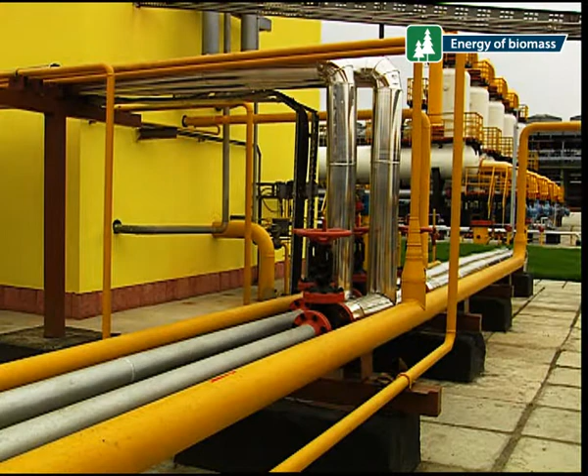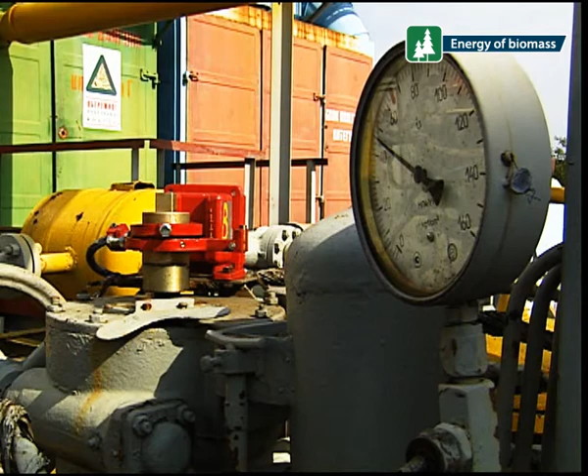Today, Ukraine depends on the import of natural gas, the biggest part of which is used for heat production. This dependency can be reduced by diversification of the supply chain and by increase of renewable energy sources usage.

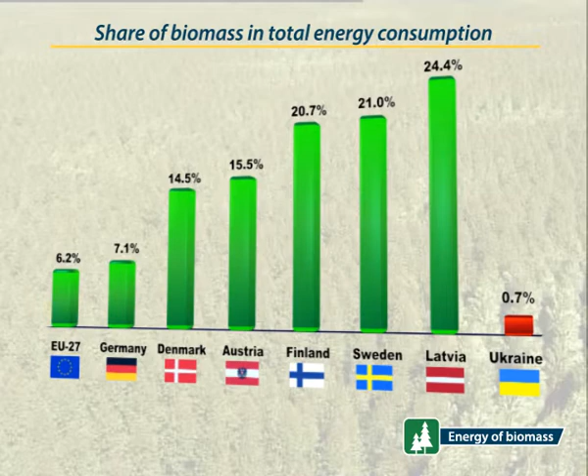Heat supply based on biomass is widely used in European countries. This renewable energy source is used as fuel at more than 800 combined heat and power plants and in tens of thousands of boilers. Today, 13% of heat and more than 3% of electricity is produced from biomass in Europe. It is planned to double these figures by 2020.

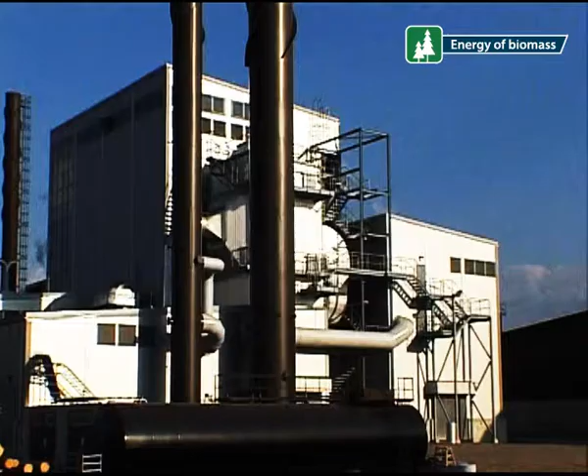Biomass Energy is a portfolio of projects aimed at the production and sale of green heat and electricity in Ukraine. It is realized by the implementation of biomass boilers and CHP plants in the municipal sector and industry.

The project, as a part of National Project Energy of Nature, is strategic for Ukraine, is aimed at sustainable development, and is secure for investments. The purchase price of the imported natural gas is growing annually. That creates stimuli for gas replacement by renewable energy sources, including biomass.

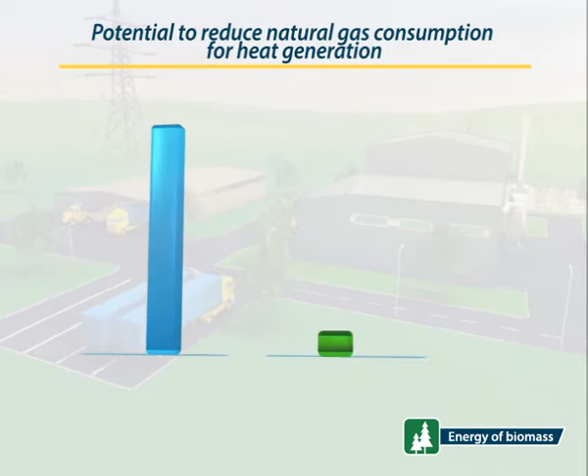Implementation of the project will result in reduction of natural gas consumption by over 5 billion cubic meters per year. The investments in the sector can exceed 2 billion euros.

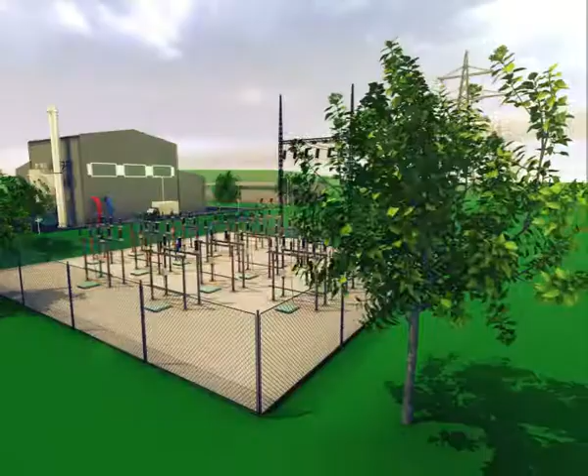The first step of the implementation of the project Biomass Energy is construction of a biomass CHP plant of a typical capacity of 2 megawatts electrical and 10 megawatts thermal. The plant will annually consume up to 40,000 tons of wood biomass, which allows supplying thermal energy to more than 100,000 square meters of heating area.

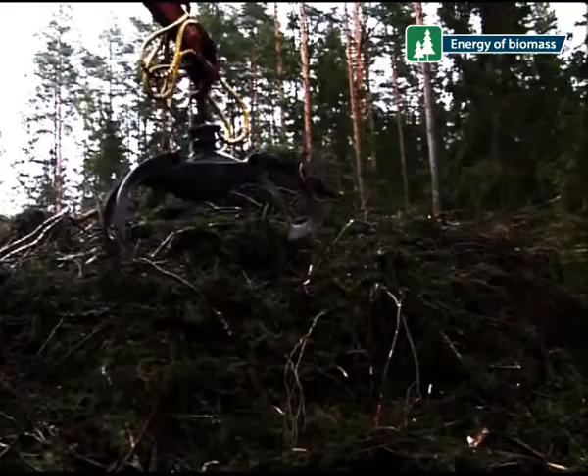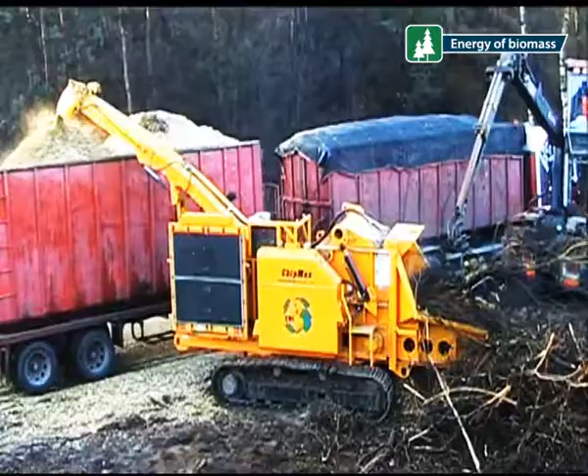The process of electricity and heat production at the plant begins with collection of the feedstock at the place of its origin. Wood residues are collected and shredded into wood chips in a mobile chipper. Then the obtained fuel is transported by a special vehicle directly to the CHP plant.

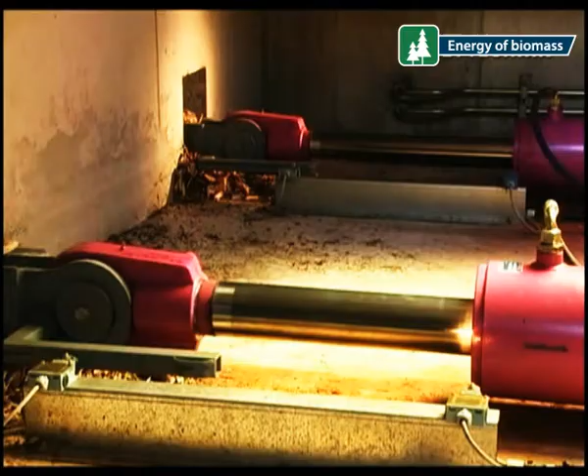It consists of 3 main buildings in which the fuel storage, the boiler house, the turbine house, and the offices are located. From the main storage, the fuel is transferred to the walking floor bunker, from which it is automatically supplied into the boiler for combustion.

The boilers, which produce steam for the turbine, are the core of the station. The steam turbine drives the electric generator.

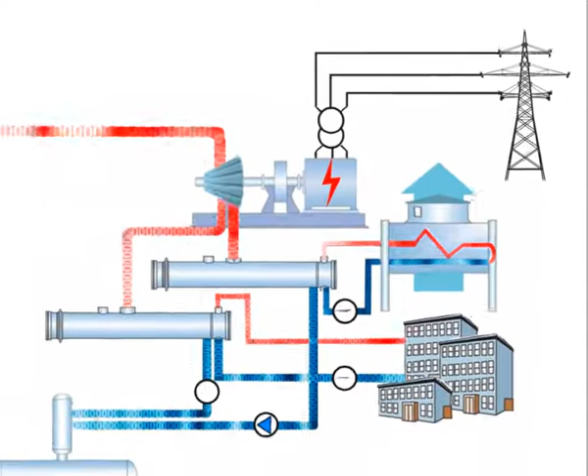Flue gases are cleaned by a modern precipitator. Therefore, the station meets all current environmental requirements.

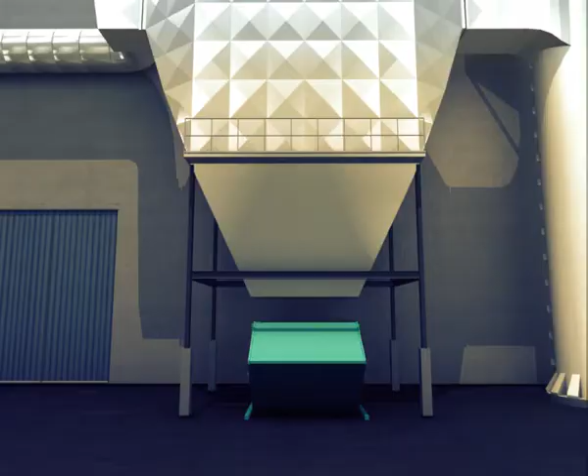Electricity generated at the plant is transmitted to the existing electrical grid and is purchased by the state enterprise energy market. The state guarantees the purchase of 100% of the generated electricity at a specially established feed-in tariff until 2030.

Heat energy is sold to the local district heating company, which then transports it to the end users.

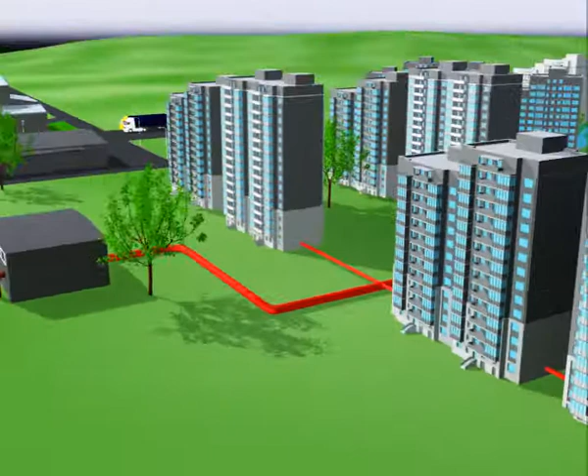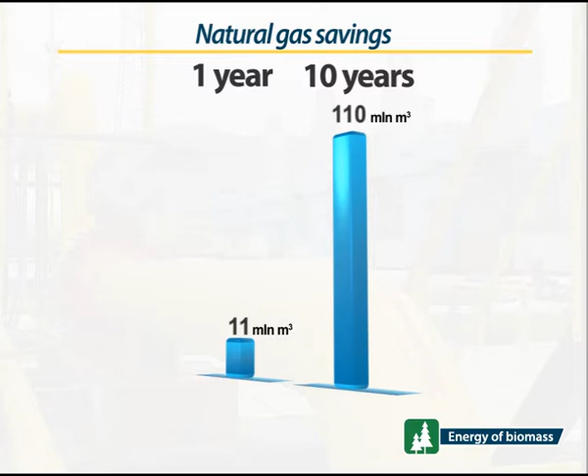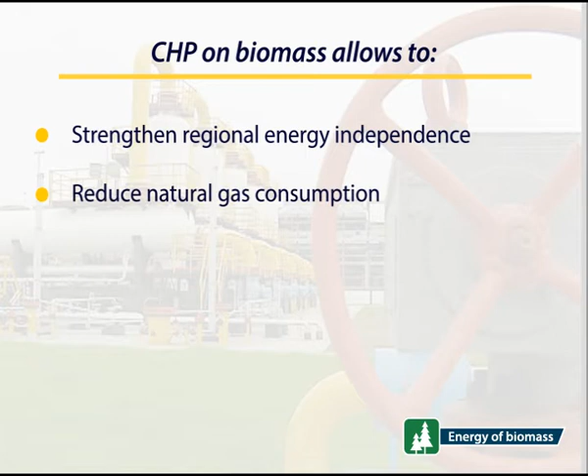Implementation of the CHP plant gives an opportunity to strengthen regional energy independence, to reduce natural gas consumption, to replace outdated equipment with modern and energy efficient equipment, to reduce greenhouse gas emissions, and to create new jobs.

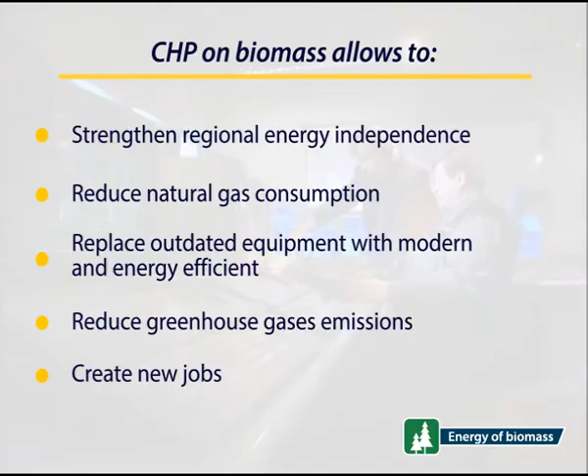The project Energy of Biomass creates favorable conditions for investors of bioenergy projects. Green energy is our goal.